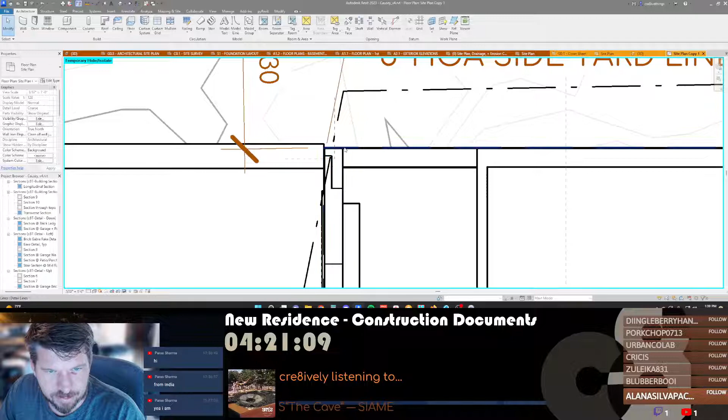What we found out is that when we change this to a masonry building, the foundation now sits outside of the easement, so we're going to have to move the house back a little bit. But we also need to make sure our footings don't sit outside that too. So I'm in a conversation with the builder.

Oops, I just sent a message to the wrong person. Gotta love that. Text.

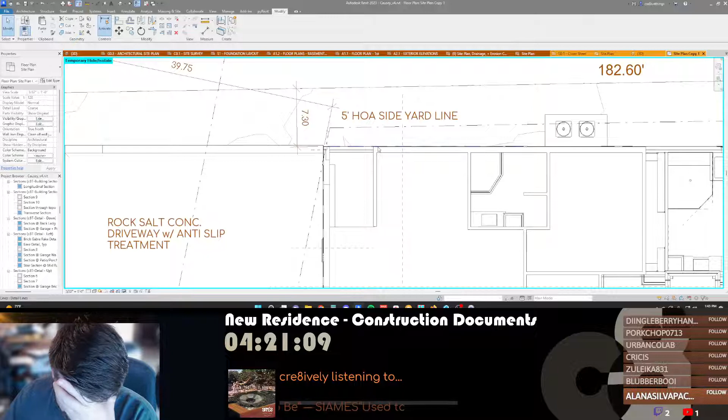What I am concerned about is making sure that the side setbacks are spot on. And I think what we're going to end up doing is - we've got, so that's 2 foot, 1'6", 2 foot minus 6 inches, 1'6". I think we need to be 1 foot from here - that's the edge of the slab. And I think we should be 1 foot from there - I think that is going to be the edge of our spread footing.

Let me see what I can get working with that in mind. I want to move that. Actually, this stays right where it's at - this doesn't move either. Should just be the end of this, means I'll have to adjust that later on. That needs to move, that needs to move, that and that. I think that's everything.

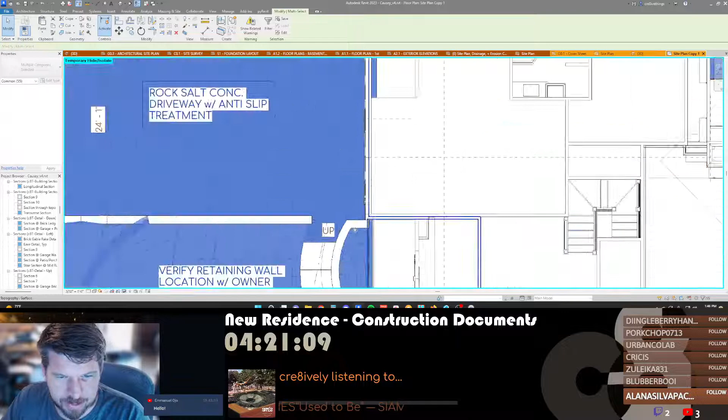As usual, this is just me making sure that I stay productive and busy, but if you have any questions about anything, don't hesitate to ask. Oh, come on.

I think the driveway is going to move. Oh my god.

So I don't know if a lot of people have found me because I'm using Revit, and I don't mind giving tips or anything like that. If you have trouble selecting a lot of things and losing that selection because you accidentally click somewhere, when you select multiple things you can save that selection as an object. So I can save this as site elements, and if I need to later on, I can load the site element selection, and that reselects everything I had selected here.

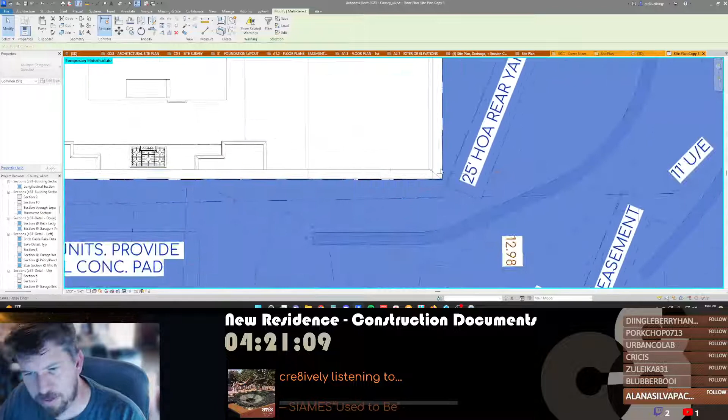Let's do this first and foremost. Let's move this guy, um, this guy right here. We want to move it to there. What does that do to us back here? We still have a pretty good clearance here, and I don't think they're going to do a spread footing back here. It should just be a turn down footing.

Slab—there's my floor. So that's the slab. It won't be 1 foot there; it should be. I did a field measurement this morning, so my brain is cooked when it comes to math, so I'm going to use a calculator.

To 8 inches, so 8 more inches. That would be the furthest out it goes there. That would be—we're still good. We've still got some distance there that we would be okay on. Now, as far as here, more than a foot. Okay, I think we're good.

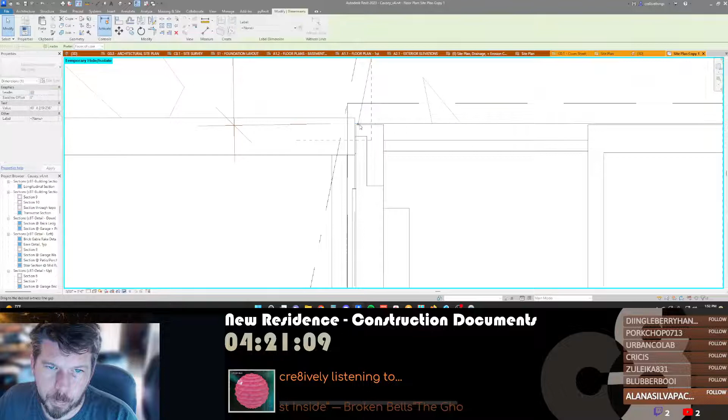So what would need to happen here is this. I'll fix all that later. I don't know what this is dimensioning to. Why is this being... that's not right either, that's a detail line. That's the slab edge. There we go.

Separation line. Topography. Okay, so I have a slab edge right there, brick ledge. Interesting.

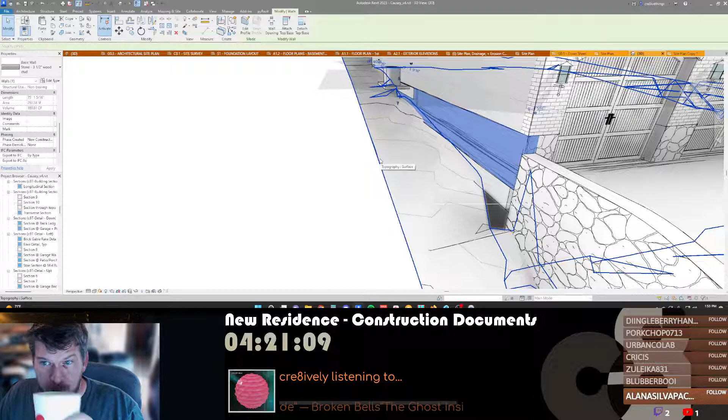If I come back here, part of our problem is my detail line is not in the right spot, so let's get that in the right spot. That's the upstairs floor, let's fix that category. That's a detail line, that's the edge of my slab right here. That's the edge of the slab there.

Does it not come into a corner here? Yeah, so for some reason I can't get this slab edge to quite meet the way that I want it to. And that's okay, we can fudge that. So what's happening is I've got a little gap here. So this—that's the edge of the foundation.

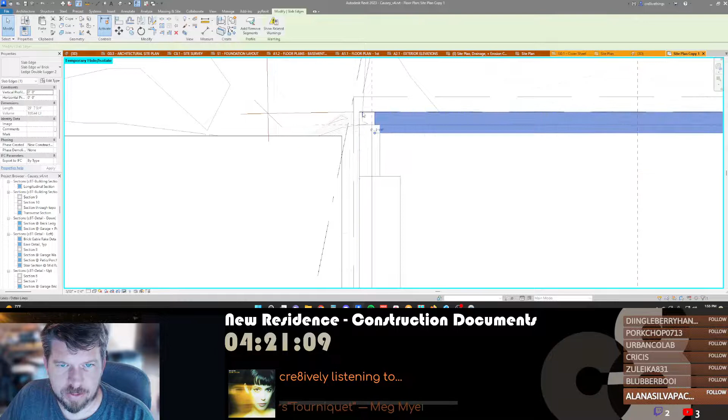This is interesting. That's not the edge of my slab, this is the edge of my slab. So right there is the corner of the brick ledge. 5.5, 5.5 feet there. 2 foot 6 inches there. 1 foot 3 inches there. So we can afford, if we want to,

we can still come back. See, it's so close back here. I think that it's going to be better to have this height on the back than the front.

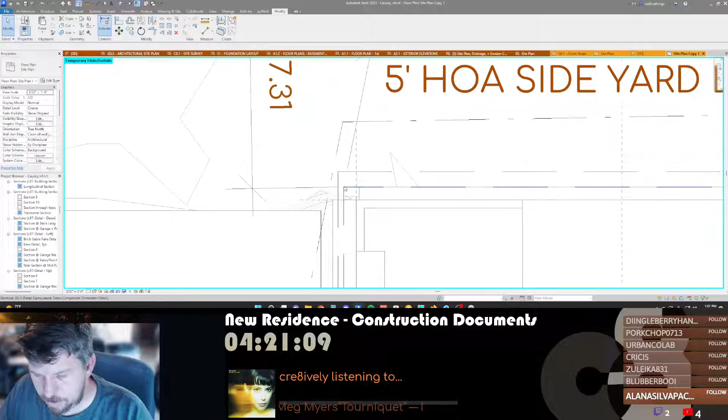That did not work out the way I wanted it to. I think that's going to be better, because now we've got one foot there, be 1 foot right here. Eek. Foot right here, 8 inches. That's what I did, 8 inches. Okay, I think we're good.

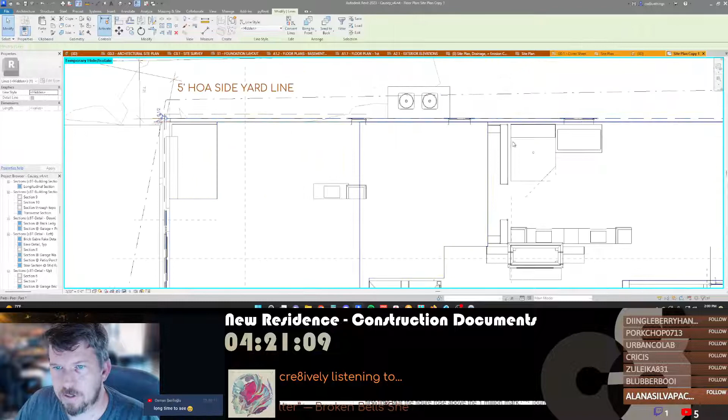Okay, I think that is what we need right there. Okay, so how do I want to show this then? Got this. Yep, and this. Go all the way around. Good.

For some reason, does this jog somewhere? What's going on here? Okay, it's fine.

New camera, home setup. Hey, Osman. Yeah, you know, it comes and goes. No, it's the same camera setup. Maybe it's tracking me, I don't know.

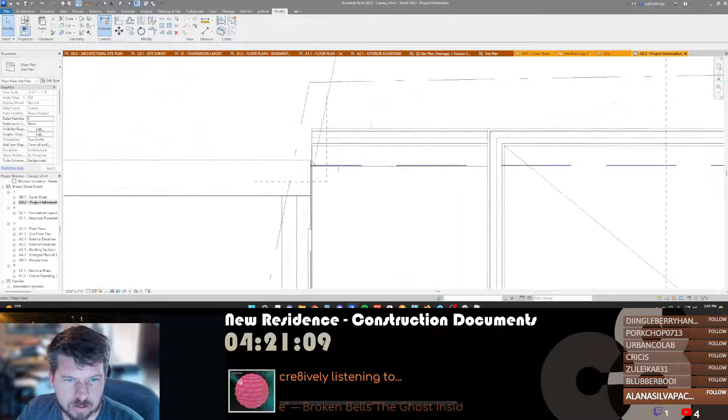Okay, project information should all be the same. What's this? Drainage plan should be the same. We need to grab this. So this will now go to the edge of this. This.

Okay, so the question now is this has some implications as well. I think we're going to do this. Oops. I don't know what that is dimensioning to there. There. We're going to go here.

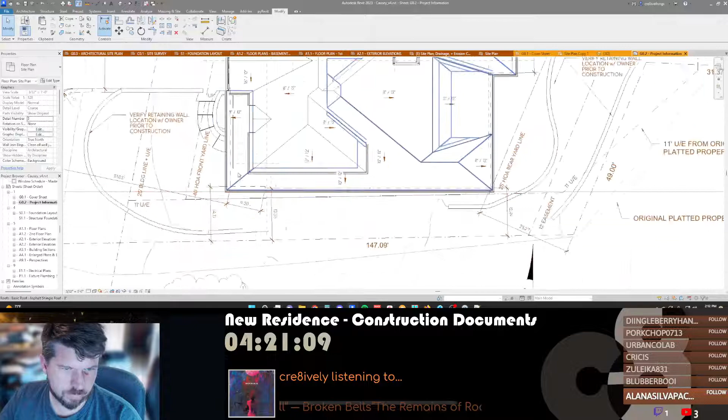Edge of slab. Okay, so now what I need to do is extend the driveway out. House.

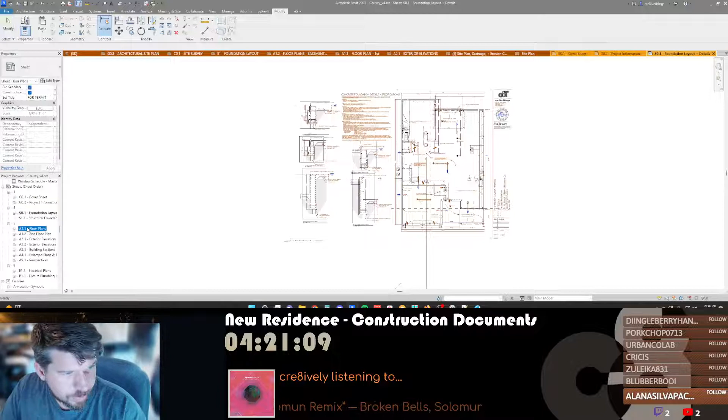Six, 10, 11, 12. Get there. Floor plan should still look good. Why is this a 16th of an inch?

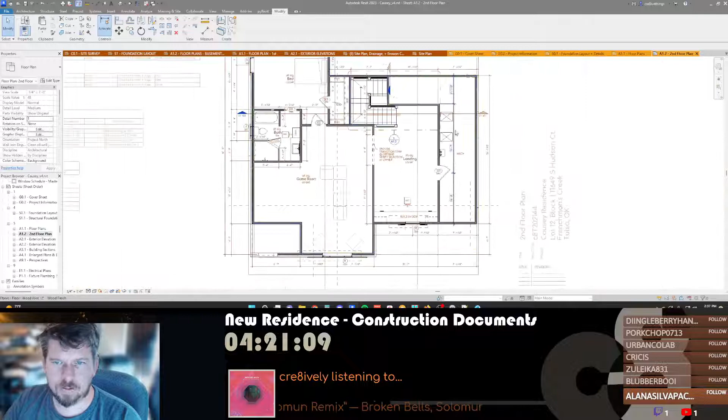What is this? Oh. Ah.

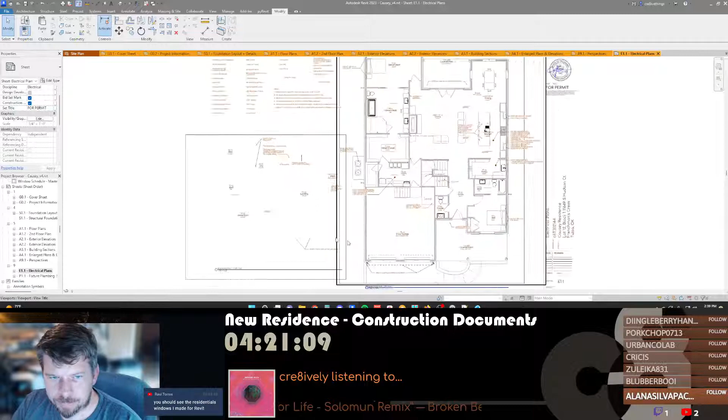All right, I think we're good to go on this one. Oops, oh well. 1032 PDF.

Residential windows you made for Revit. I'd love to see them.

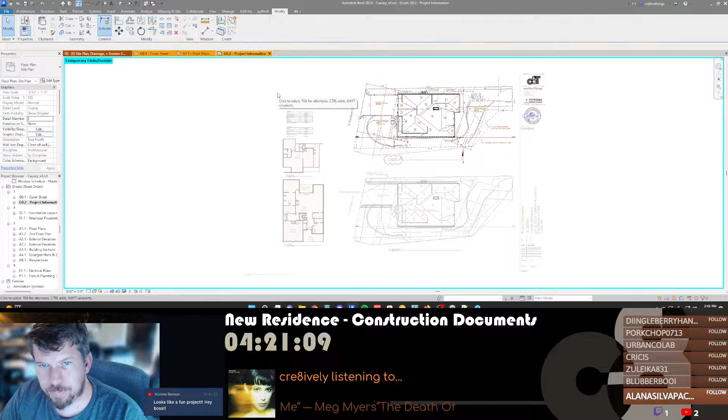Let's see. Gummit. I think I'm going to make Revit do that again. These drawings keep coming out in the wrong order. I think it's because I started this project before Revit allowed updating the order of the drawings as they're printed from PDF. That's right.

Hey, Courtney, how you doing? Nice to see you around. How have you been doing? Working on dispensary farms still? Did you ever end up being able to work on the church project any? The one that was behind our office?

This one was a fun project. I wish you guys would have been able to work on it with me because I would have loved to not have had to do some of the stuff that I had to do on this project. I know that sounds bad.

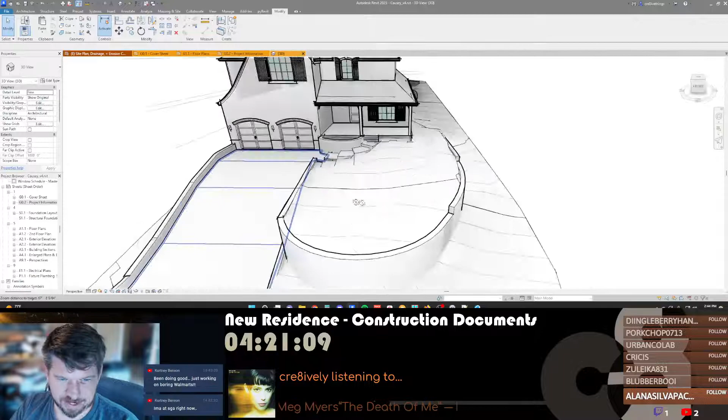Oh, that's right, you're with Seltzer Schaefer now? That's right, SGA. Yeah, I work with Andrew Brister, who works with Greenlight, but I think offices out of SGA. I think he does a lot of scans for the Walmarts. Yeah, those Walmarts can get pretty brutal, not only in the repetitiveness of the details, but the deadlines too. Walmart's a pretty demanding customer, or can be for sure anyway.

He is, he's super smart. I had forgotten, we're actually doing a game night Thursday nights with Andrew. I had forgotten that you're working with him now.

Oh, I just realized that all of my text has not been moved on this drawing. Oh, all of this has to move too.

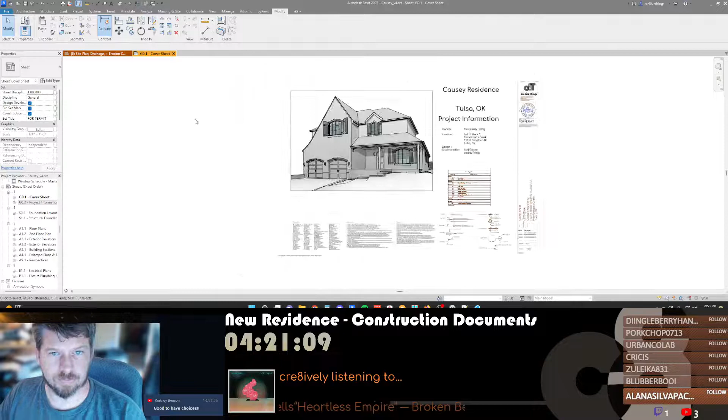That is fantastic. It is nice to have choices. I just wish I didn't have so many projects that I'm behind on.

It's also the nice thing about being able to work directly with a client is I can be very apologetic and only have to deal with the client, not an employer also.

This project, I'm just going to close this project for now. So let's start a timer for this one. It's going to be a new project.

Okay, so that is a problem. No, it's not, okay. It's probably not the latest one, but it is still something to start from.

All right, let's save this as two.

Yeah, it's really weird, you know, I took about a month and a half hiatus. I was still working, but after we closed the office, I had one contractor who picked up a project that Delineations had worked on and then asked me if I wanted to start doing some drawings for him. And he has kept me pretty busy ever since. I've got a few other clients that I'm working with as well, but he's definitely been keeping me pretty busy.

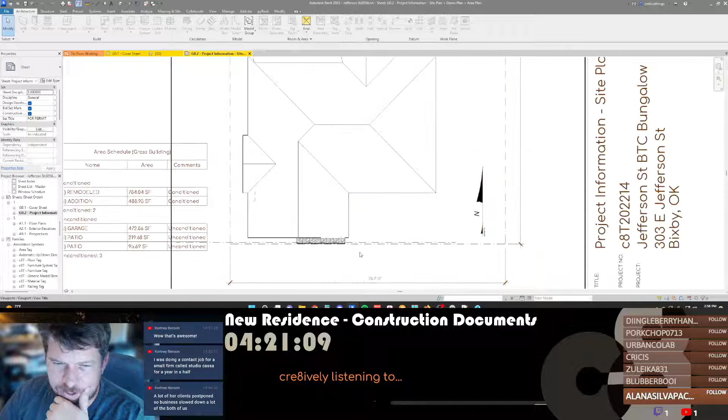And that's fine, they are supposed to be getting a survey back to us, so we should be hearing back from that pretty soon. I'll send a reminder once we've got some good progress on this, so that we can say we're waiting on them. That will help with the other information here.

Yeah, so the drainage, well, I don't know that we're going to get a survey. The drainage should be as simple as showing them that.

So I actually just finished, I was just finishing up the Causey project because the builder called and said there were some other issues that he wanted to work through. So I was noticing that that's actually a really good reference set for permit drawings.

Gotcha, so I'm going to open up that latest permit set and we can look at the drainage. So the drainage should look kind of like this.

Now this one has survey because it was a pretty topographically heavy site, so we needed to have that on there. But yeah, essentially we want to make sure that they know,

that what the flow of the water on top of the soil is. And then what I do is I put a little either 3 foot or 4 foot skirt or apron around the whole building. Right, so that if we have...

Which I've been doing, I just don't know where the flow is. Right, yeah, that might be something where we just look at a picture and see if it's flat, then let's just show it. It's been pretty flat there.

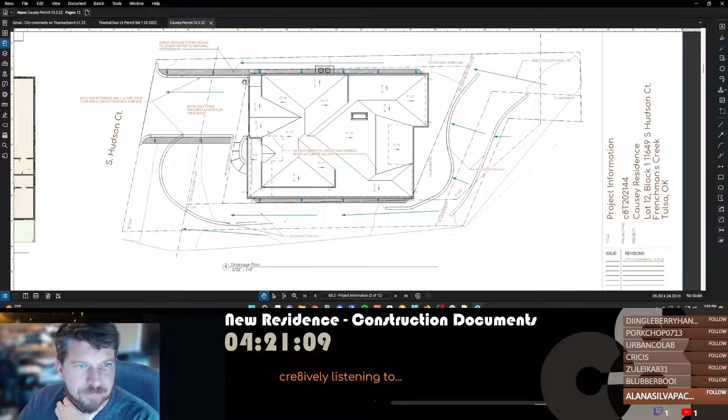We should probably show downspouts like this, and I typically show them. I'm not seeing what you're talking about. You don't see my screen? I'm still seeing the top of it - the topographical.

Not updating my screen. It's two little squares dancing now. Well, that's on my camera. Turn the camera off, we're going back to the other blue screen now. Did you open the stream, or did you click on my camera? Just looking at the top. There you go, I got it now.

Okay, so the downspouts, just a square with DS on the side. And we should be matching pretty close to what was already there.

Actually, I don't think the original project had downspouts. No, they don't even have gutters. Yeah.

Okay, we definitely... we should probably show downspouts and gutters. Actually, that wood doesn't look like it'll hold a nail for a gutter. No, it's a fully redone roof, or it should be. So it's a good thing, because that wood does not look capable of holding a nail. Yeah.

Gotcha. Yep, let's see here. We should go ahead - I was just going to say, which could be an adventure, because I've not successfully attached gutters to a house yet. I tried to do it for the Collins Cabana, and although I was working with an existing system, there was something really wonky with the end I tried to attach to.

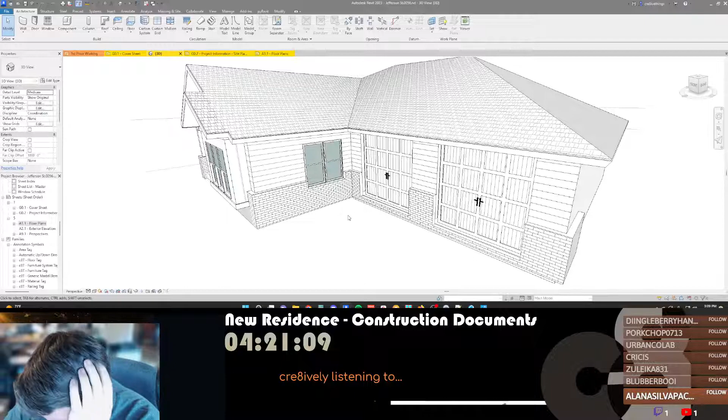And because this is going to be sitting on grade, they're going to have to do something for a masonry ledge around the outside.

So let's see here, we can look at... just close that. So the reason I was asking is that's another one of the things I'm not doing a lot of. I'm doing some part of a CMU around it. Probably need some guidance on what to do dimensionally to get it right.

So what they're probably going to end up needing to do - so this is what's going on right now is they've probably got a CMU foundation just sitting in the ground with a brick sitting on it. But that brick is inside of the...

See, the brick that we're going to do is going to be outside of this, so we're going to have to modify - we're going to have to pour more foundation here. All right, I'm gonna have to think through that. Gotcha.

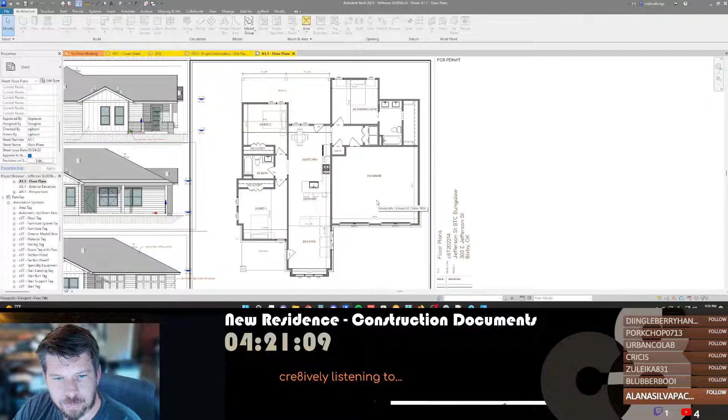Well, what I'd probably do is I would do a foundation layout for the entirety of the whole house, and then we would just mark which part is existing and which part is new - the entire perimeter of the foundation. As far as what's new, if you say we need to add more foundation, that won't be in this iteration, but what I'll do is the entire perimeter. So the patio is new, the flooring and the foundation.

So with this, because it is crawl space, we're gonna have to show - I'm trying to find a good crawl space foundation section. On the east side of the house is new, right? So that's something that flooring and such, right?

I don't know what you mean by flooring. We don't need to show the flooring of anything in the foundation plan. Sorry, we didn't talk to the foundation.

So the garage is going to be slab on grade, and it's going to be about a foot below the new floor. So everything, if you're looking at my screen, everything that's blue right now is going to be new, and it's also going to be elevated to match the height of the existing floor. I'm with you, yeah, I see.

So we've got that floor there that's generic for us, we need to change it to the floor assembly. Yeah, which is going to be 8-inch joists. It's going to be probably some weird number like 17/32 flooring on top of 8-inch joists. Will there not be some sheeting underneath the flooring? That's the decking, yeah.

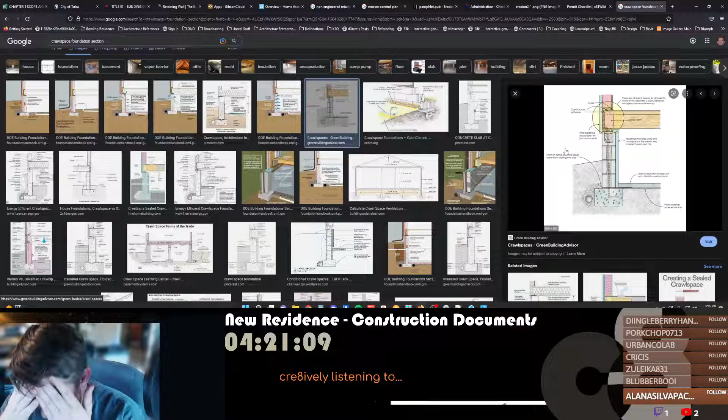I think that we should show... is there a point you would need to drive down to Bixby and just look at it? It probably wouldn't hurt for us to look and see what's currently there, but at the same time, it might be something that we address when they get comments back from permit, because BTC probably has a pretty elevated relationship with the city of Bixby, so it might be that they are able to do some design build stuff where they get it inspected on site when it's being built, kind of deal.

This section here is probably what ours should look like on the new stuff. What are you pointing at there? I'm pasting it into the one that's on the top right. Yeah, I just put it in Discord.

So probably CMU block wall with a strip footing underneath, and it's only going to be like 2 CMU because, if we're at a foot, right, the bottom of this has to be 18 inches below grade for new stuff.

Actually, have something on the wiki for this. Permit checklist, document standards. Oh, there's actually a permit checklist page on the wiki that has stuff for drainage and site plan and reasons you got through this process.

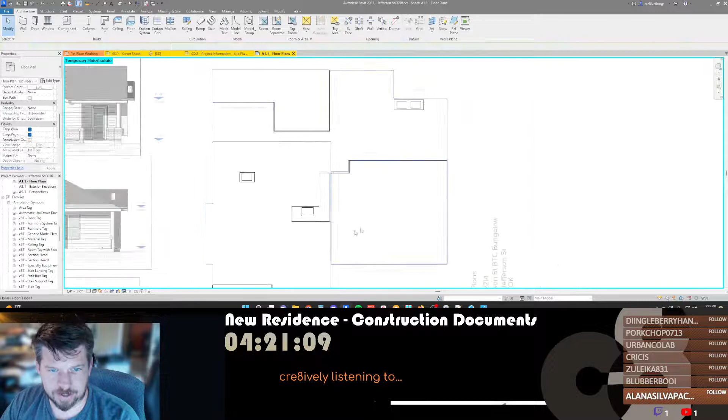All right, so for the foundation plan, we need to show what the extent of the new is and what the extent of the existing is, so it'll look pretty close to just like this, with dimensions showing existing, and then from here out it's new. And then we'll want a section where the concrete slab meets the new right here. We'll want to detail here.

At the perimeter of the new crawl space floor. And then we want to detail at the new crawl space floor and the garage slab, and we'll want to detail at the existing crawl space floor and garage slab. Gotcha, that makes sense.

Section, you think just one section of the view? I would do—I mean, I always like to have one at the entry. That probably wouldn't be a bad one to have, just straight through the entry right there. And let's see, we probably want one that goes through the existing in the garage. Gotcha.

We might need 3 sections. I think we need one this way that goes north-south. And then if we really wanted to cover our bases, I think one north-south through the garage, through the new portion of the house. It's not that much more. Right, yeah, I think...

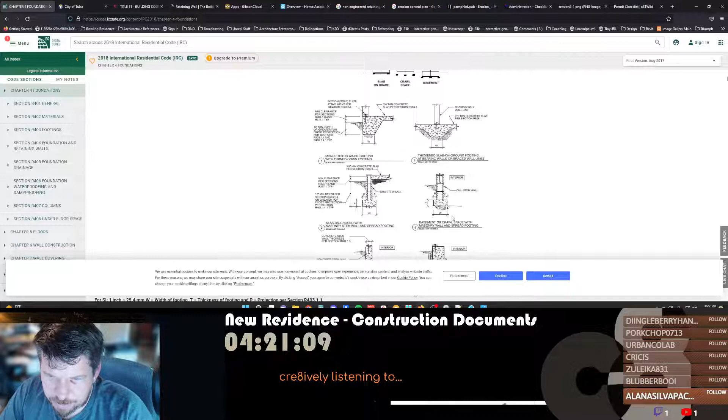We would be looking at, yeah, there's a lot of stuff here. Basement or crawl space with masonry wall and spread footing. That's what we'd be looking at.

I don't think we're going to be doing a concrete stem wall, but I could be wrong. That might be what they end up doing. They would have to make that decision if they decide to do some remediation over here. Exactly, I think that's what's going to have to happen.

Okay, what else? I think that gives me enough down the road where we can do a red line. The problem is I didn't do enough work to even red line.

So we've got floor plans. You'll get that up to permit set, and then roof plans and details. So we want to make sure that we have the framing notes on the sections. Yeah, and the strong back detail there, stuff like that. So you have the strong back detail included in this one?

Yeah, I think they'll probably frame this roof. I don't know that they're actually going to get trusses for this one. Elevations, wall cross sections. So wall sections and then detail sheets. I don't know that there's any details outside of the foundation details that we'll need.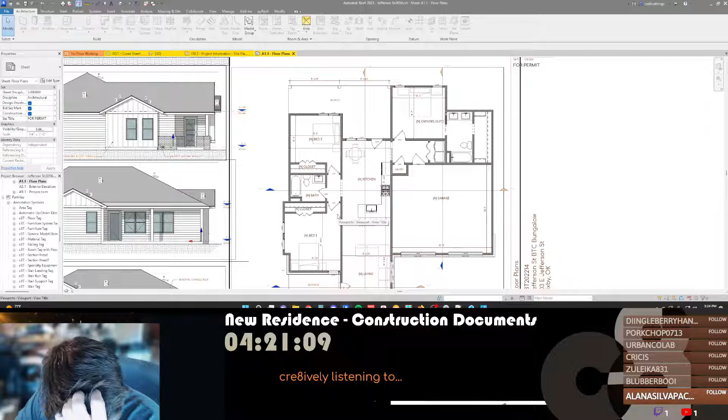Let's see here. I think we'll probably plan on mechanical being up in the attic space, so we'll need to be sure we add the pull down for the attic space above the garage. And do you know about where it's at? Oh, there isn't one currently. Got you, yeah, there is no attic space right now currently, I think. Actually, there might be. Yep. Well, there's an attic fan currently, and they're getting rid of that, I believe.

Here's the furnace. I believe it is in this closet right here. Got you, which would be somewhere about where the kitchen is right now. No, it would be right here. So we would need to relocate the furnace up into the attic from here.

So it might be beneficial to maybe put the pull down somewhere in this corner of the garage, the northwest corner, pulling down so that you would go up and over this wall here. Because that would put it... you got, when you put in the new system, you got to put it somewhere in the general vicinity of the old one as far as plumbing and such. No, you don't have to, but it would definitely make it a little bit easier so they don't have to rerun all the ductwork. Easier and I assume cheaper. Yeah, possibly, etc. Yeah.

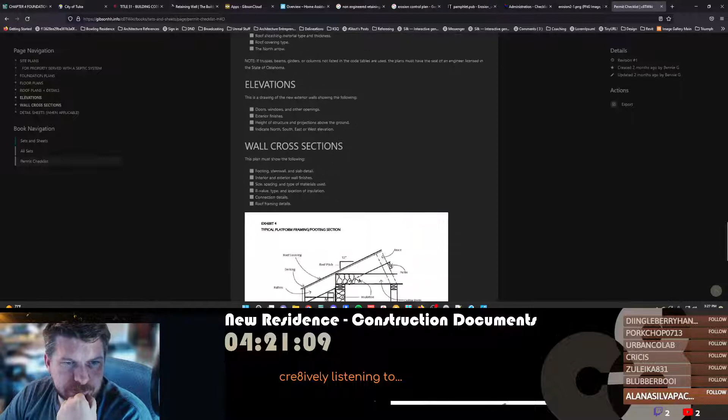Let's see here. I need to take this list from the city and combine it with our list. So I think you've got a checklist from the plan checklist. Schedules, floor plan, units. Yeah, well this is a more thorough list, so we want to just make sure that anything that's in the city list gets added to this, and then this is the one we just go off of.

So the thing that I want to make sure that we do though is break it down into the different phases, because if we're just trying to get a preliminary set out, we don't want to have to spend all the time to get a full permit set ready. So right, all right.

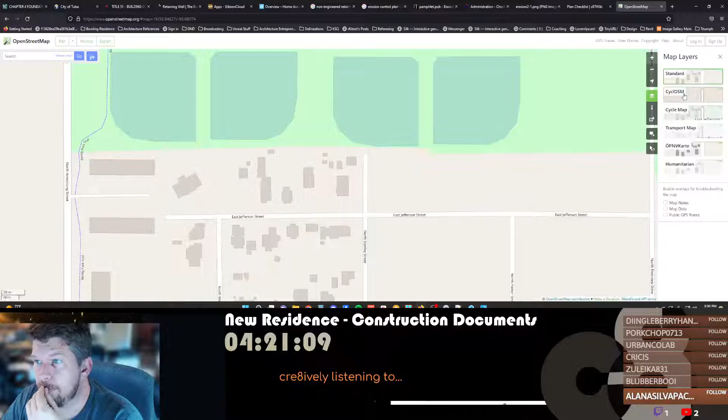I think this is right. Well, why not? There's no satellite.

All right. And of course, why would I be done with that other project? Um, okay.

What's happening here is this contractor doesn't know how to read drawings.

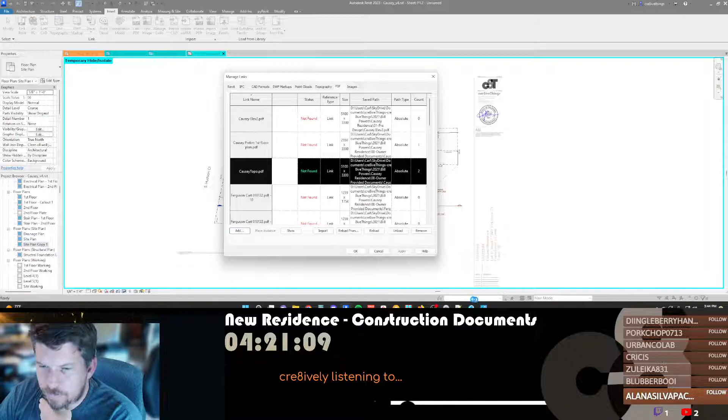Is that really only an 11 by 17? Yes, it was.

73.77 feet. And then the question is, how close is that? So this should be 182.6 feet. That's pretty dang close.

29'4". 29.24, okay, that's also pretty close. We're going to say that that's really dang close.

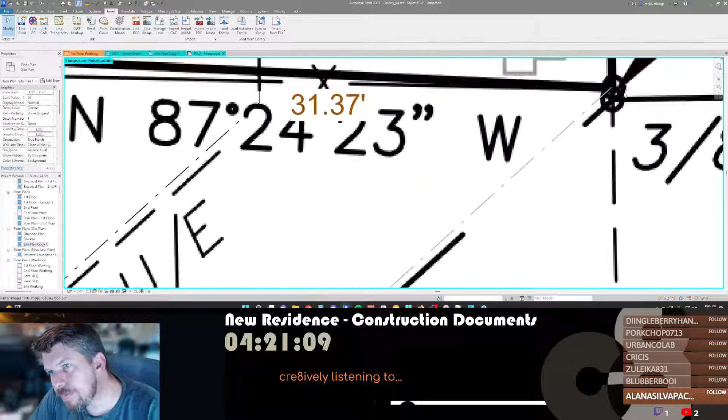We're going to say that that's pretty much spot on.

I think this is going to be the clearest way to do this.

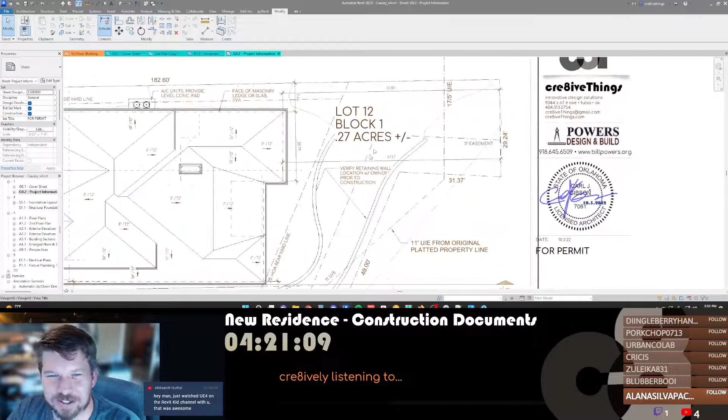Is this one all jacked up? I think it's supposed to be like that. No.

Anyway, so right now I'm trying to get... we're going to call this ASI 1. Site layout, supplemental info.

I think these are the same dimensions. It's just he's just not taking it out to the edge of the.

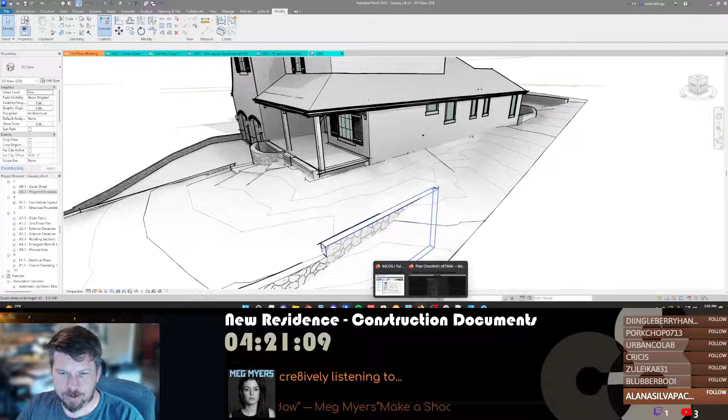You know what we're probably also going to do is we're probably also going to have, what's this?

There's so many pads in this model. Don't understand. Hey, scout that dog.

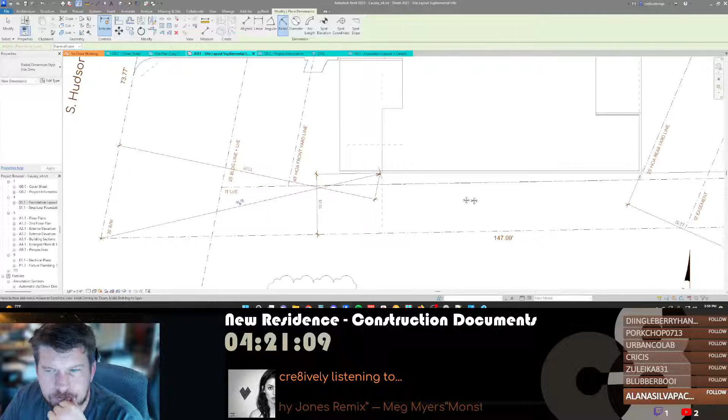So how have you been doing? What's the last stream that you saw? Give me an idea of how long it's been.

So let's bring this out to here. That we can get rid of. This we can get rid of. I think this is what he's wanting.

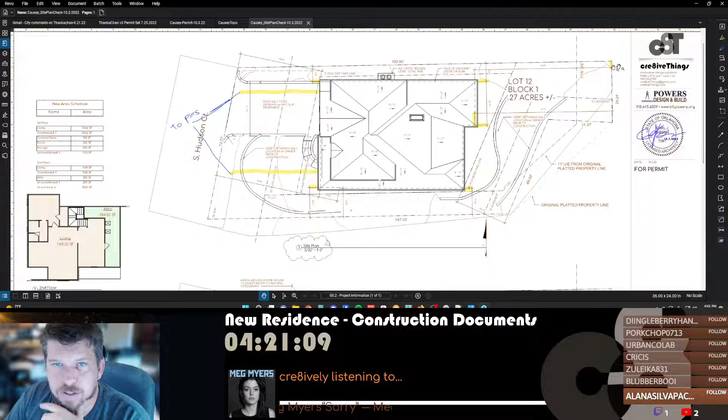Oh, because it's not perpendicular. So I drag that out, that out. That's to the pins, those are all to the pins. That's to the pin, that's to the pin. I'm not sure what these dimensions are.

Okay. No, that's not how it works. That's not how you dimension sites.

I just realized what he's saying. He wants this dimension right here instead of parallel with the site. But that's not how you dimension site plans.

What are the chances that I give him this information and it doesn't actually help him? Guess we'll find out.

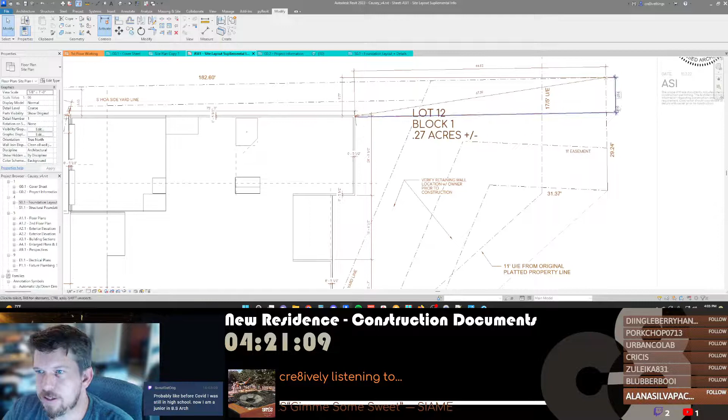Nice, congrats. Awesome to see people from a while back getting what they're looking for.

How do I want to do this? Junior BS Arch, that's fantastic. Yep, want that. There we go.

First of all, I think we're going to make these halftone.

I want to do this so that the dimensions that are perpendicular are done one way, and the dimensions that are... so let's do like a green, because green is what he wanted.

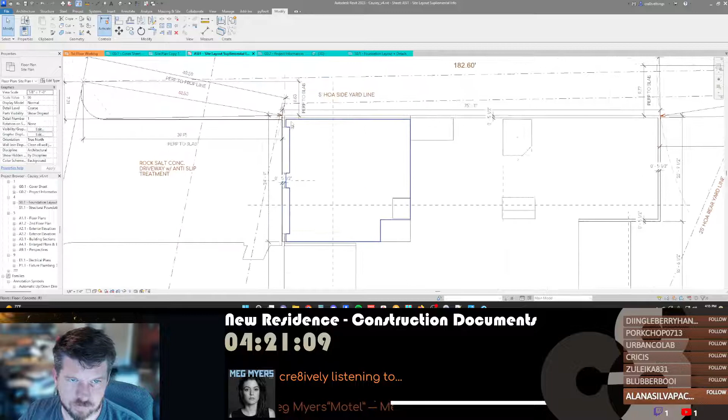Did I miss any other ones? Yep, I missed that, and I missed that. Elements. Excuse me. Perimeter.

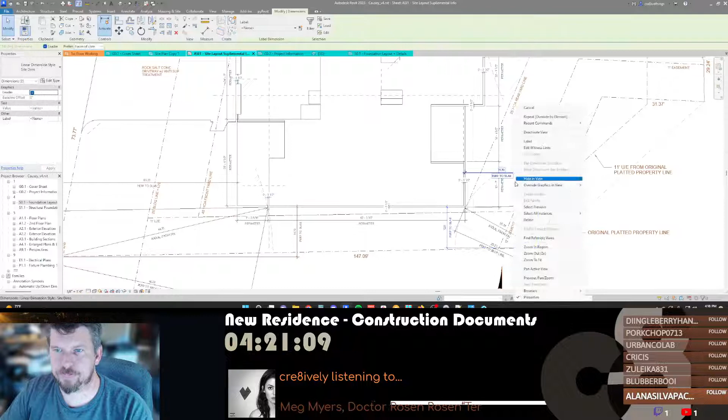You ready for soccer practice, buddy? Hey, pull it away from, not out, but back towards the hinges.

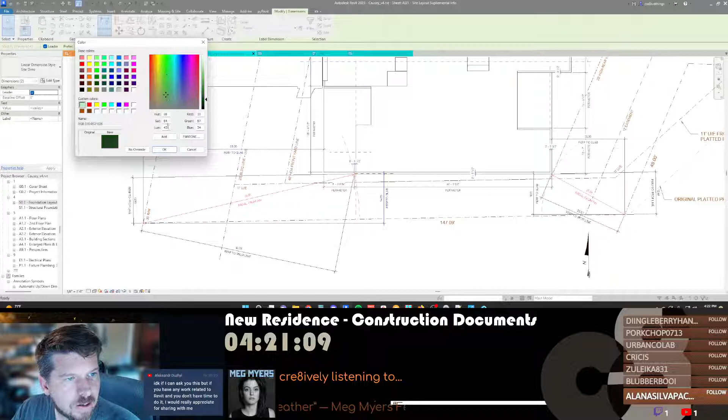Perpendicular to slab, it's green. Perpendicular to slab, perpendicular to slab. This is perpendicular to slab. I think that's what you're asking. If it's not, let me know and clarify what you're looking for, and we can discuss that as well.

36, 87, 54. Add. There we go. Change that to all of these.

Okay, perpendicular to slab, and then we got perpendicular to property line. Projection lines, let's make these nice and thick. That wasn't thick enough. I guess they are thick. Let's also make floor slab edges thick as well, maybe like 10. Yeah, that works, that's nice and thick.

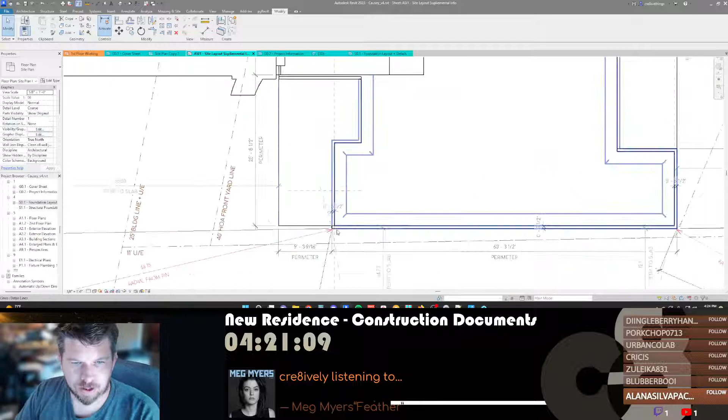This corner is where the masonry ledge returns to the porch slab. Verify with owner if the masonry ledge should be around the porch slab also.

Do do do do do do do. No title, rushing.

Okay, I think let's do this as well. So let's go floor and floor slab edge. Surface patterns, let's override that to be solid.

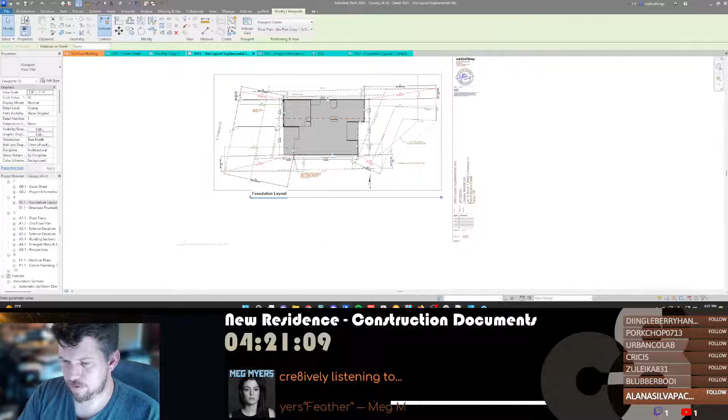Foundation layout on site plan. Okay, I think that's what we're looking for. ASI, foundation layout on site, 2322.

Uh-oh, where'd I put that? Almost there.

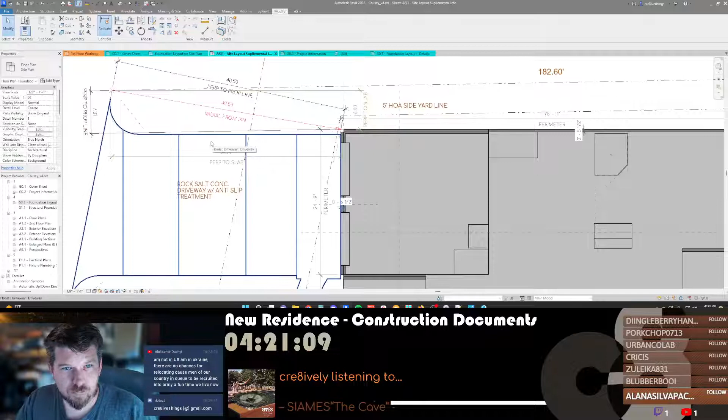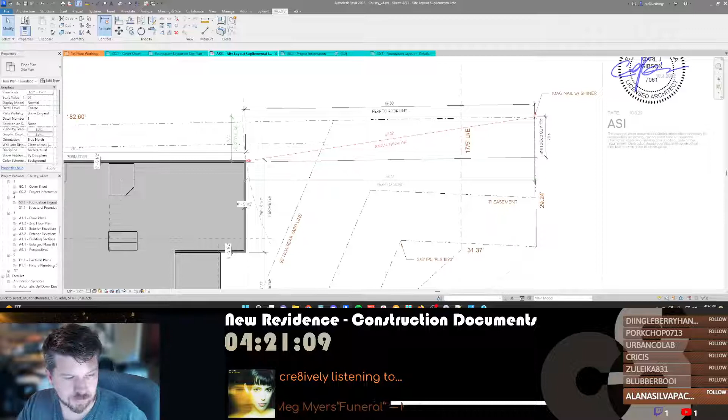All right, I think that's it. ASI foundation layout on, foundation layout on site plan.

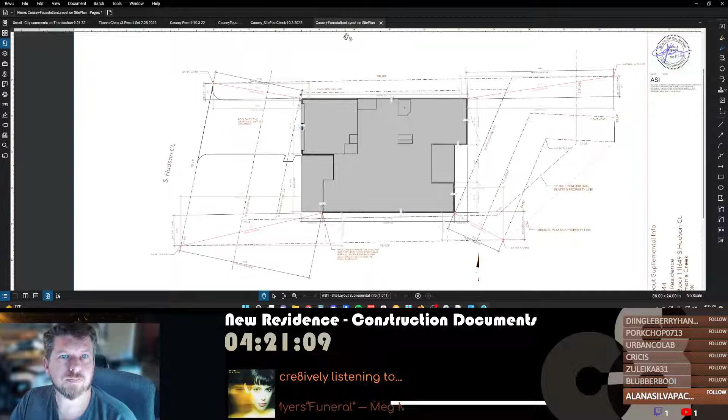I think everything looks good here. All right. I hope I saved that.